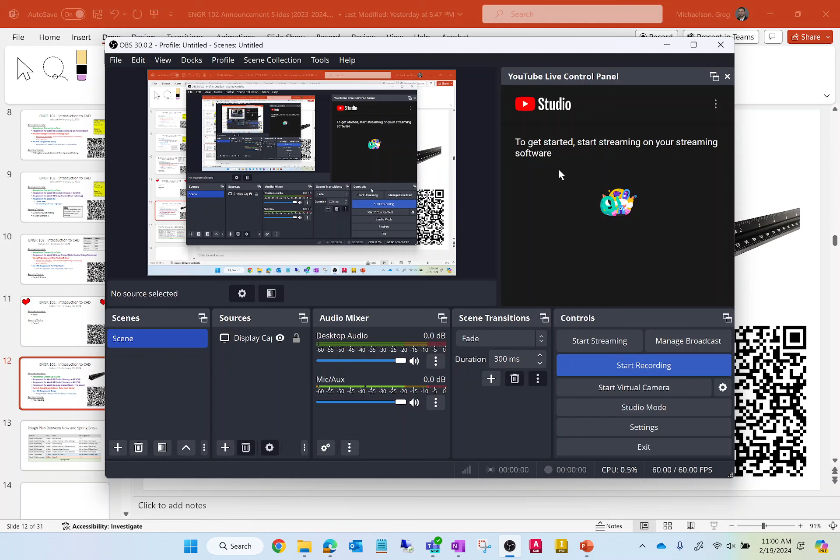One of the things I will tell you is that, independent of one topic left in AutoCAD, which is dimensioning, I've kind of taught you everything you need to know in terms of preparing drawings. And when I say everything you need to know, I mean technical-wise, in terms of what buttons to hit, what items to draw, and so on and so forth.

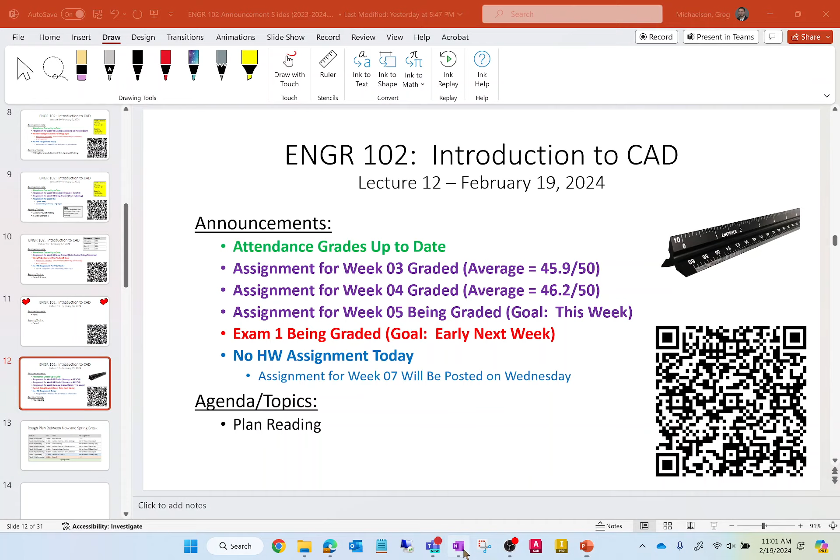To make the point, I want to bring something up real quick. I drew this on the board a long time ago, just a sketch of a plate with a hole in it. Now, my question to you all is, could you draw that today? Yeah, you could, right? There's nothing really to it. And so if I present you an engineering schematic, you can draw it, right? I think that's fair, okay?

What we're going to do for the next few weeks, yes? What do you mean by thickness? Like the line thickness? I'm talking about the thickness of the plate, like the part thickness. But what I'm saying is, from could you reproduce this, could you write that text in AutoCAD that says 0.25 inch thickness? And I think by now we all would say yes.

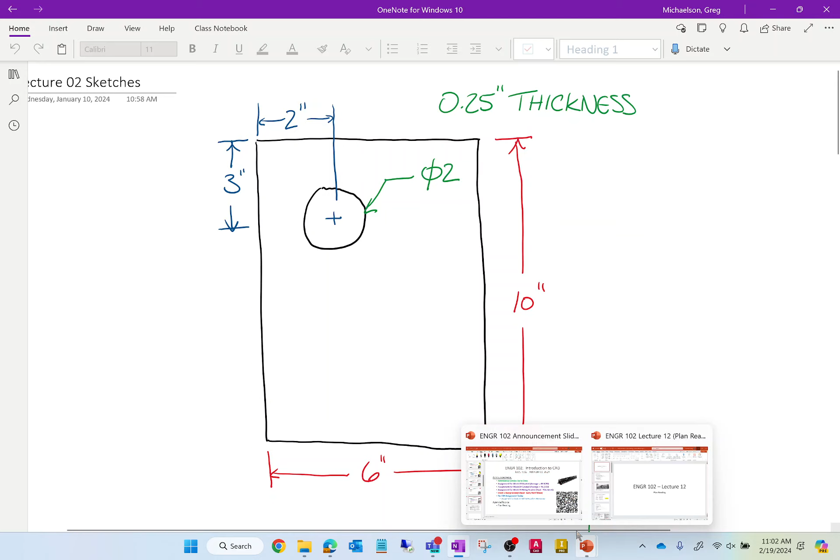What I want to do for the next few weeks is take the skills we've learned in AutoCAD and start applying them in more real world settings. So for the next few weeks, when it comes to specific AutoCAD skills and what's on the assignments, I'm probably going to be a bit less micromanagerial. In other words, the assignments are probably not going to be draw a line that is 1.5 units across at 60 degrees and so on. Instead, it's probably going to be, here's an object, reproduce it, or prepare drawings for this object and so on, because you all have the skills necessary to do it.

So I will probably be light in my specific instructions on AutoCAD and more heavy on actually applying those skills in some settings. Does that make sense? I just want to prepare you for what's coming.

Today and this week will be a little more loose in terms of work requirements, for a couple of reasons. One, it's my first time teaching the class, and the last thing I want to do is keep shoving material down your throats. I want it to be absorbed, and I want it to make sense.

So I started to prepare some lectures for this week, and I was going through the dimensioning lecture, which was going to be our topic this week, and I remember sitting there thinking, man, it'd be really nice if we could actually look at some engineering drawings. Then I looked at my outline, and we were going to look at engineering drawings, and I went, wait a minute, I'm the professor, I can rearrange this if I want. So I said, let's do that first, okay?

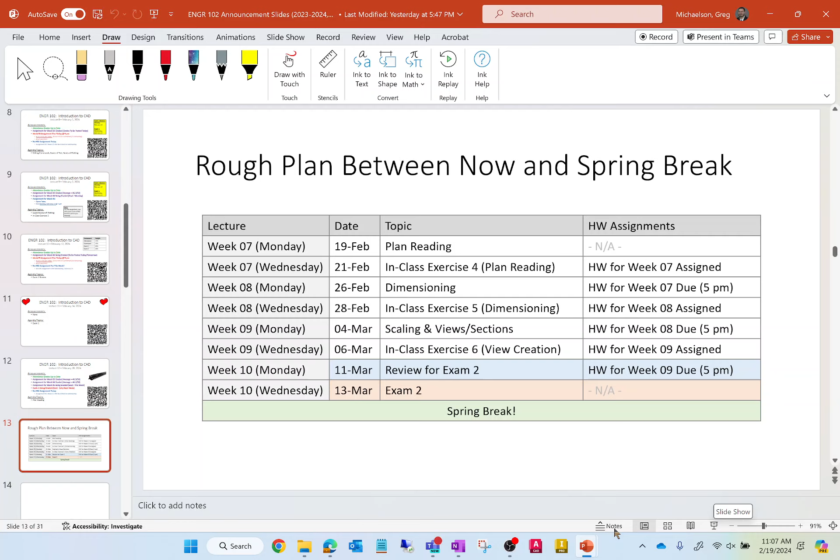So today, like I said, we're going to take a little break from AutoCAD. Today we're going to look at some real-world plans. We've talked about this a little bit at the beginning of the semester when we were first learning about this class. The very first lecture we had was, okay, let's look at some engineering drawings.

In fact, I might pull that lecture up just to refresh everybody, because I know it's been a while since we looked at that. Let me go up, let's actually take a look at that real quick, because I'll be brief. Oh, wrong week, that's the wrong one. It would help if I opened up the right one.

That's the one I wanted.

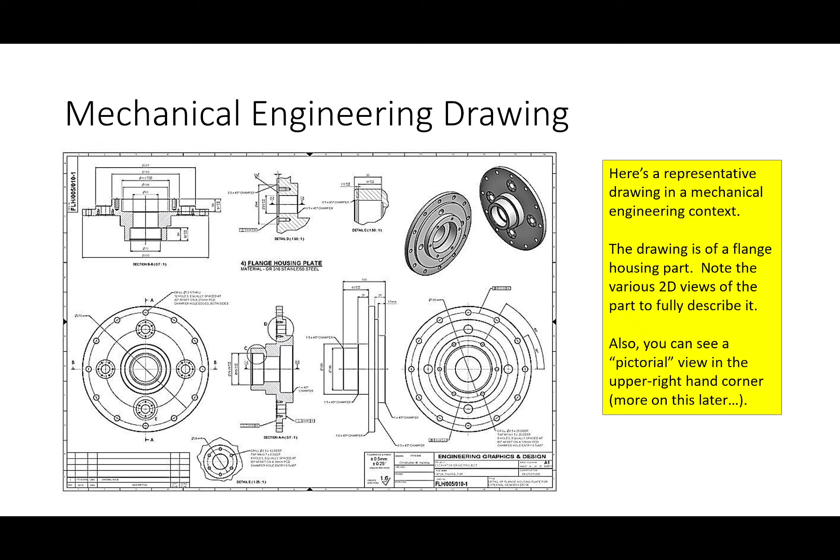So if you remember, we opened this lecture by looking at some engineering drawings. I showed a picture of a mechanical engineering drawing, a picture of a civil engineering drawing, and then the rest of that lecture focused on the AutoCAD objects of the drawing. Every drawing has lines, text, polygons, rectangles, and all of that stuff. And yes, that is true.

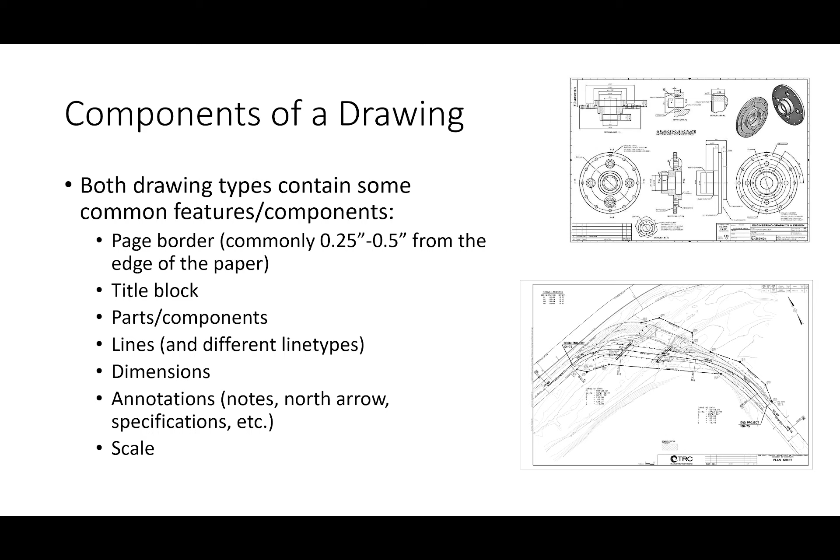That is important. You cannot construct engineering drawings without those objects. But a bunch of rectangles and offsets and trims and extends and ellipses doesn't make for engineering communication. Engineering communication has to communicate intent. So instead of talking about the components of the drawing, I think what I want to talk about today is what's actually in the drawings.

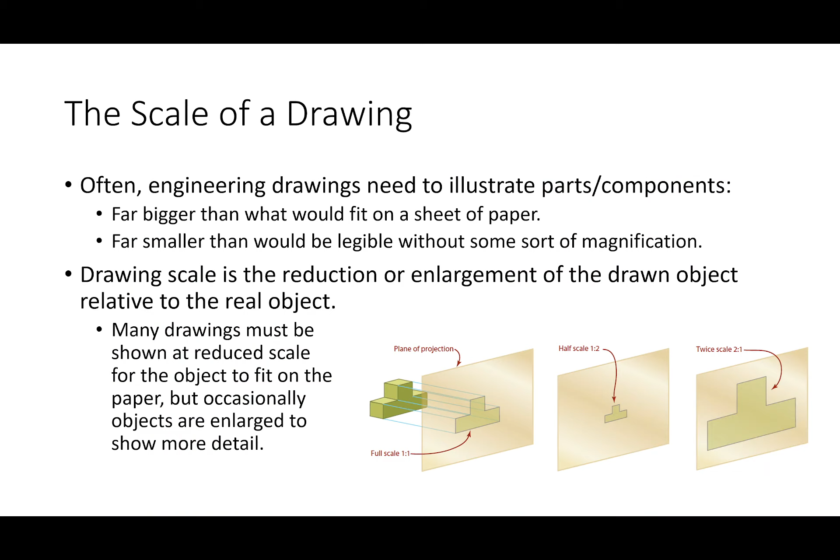A lot of last time's lecture was about the views, scale, dimensioning, and all this stuff. So now I actually want to look at some real drawings. That's what I want to focus on today.

Let's make sure we're clear about what engineering plans are used for. They're used for a great many purposes. I think taking a plan and a design and developing it into a coherent proposal is definitely one key use of a set of engineering plans.

I'd say the primary use, though, is probably to communicate the concepts, the dimensions, the ideas between the engineer who designs the component, the system, the assembly, and those who are going to construct it, fabricate it, or manufacture it. The engineering plan set is really the communication mechanism.

As engineering students, throughout your 4 years of education, AutoCAD and the skills we learn in this class can seem like a footnote in a grand 4-year degree program, because you'll go learn about thermo, fluids, strength of materials, manufacturing processes, hydraulics, and all this engineering stuff, and you might go back and think, man, it's been a long time since I opened CAD.

But really, at the end of the day, whether you're designing heat exchangers, pacemakers, retaining walls, or whatever, in order to construct those systems, manufacture them, or fabricate them, there have to be some sort of plan sets. That's really the goal at the end of the day.

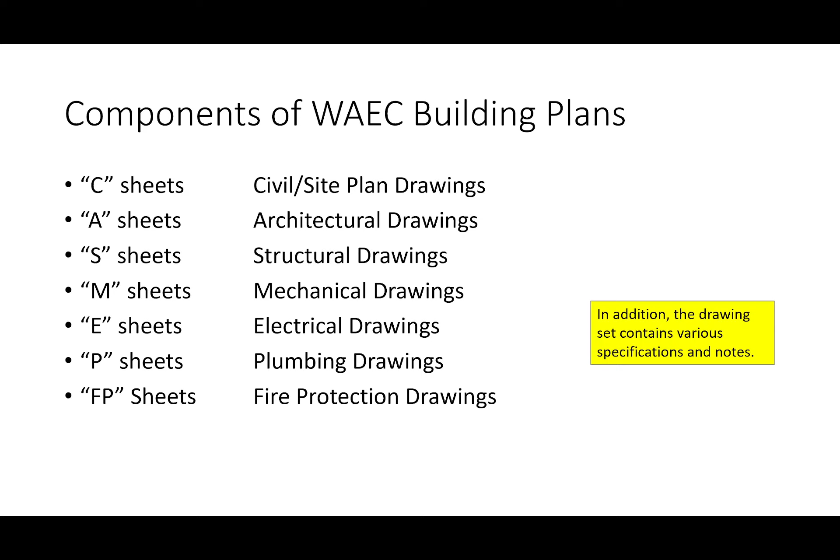Now I want to give you some understanding of the navigation of what's in these plans. I like this because there is content for pretty much every discipline in here. The biomedicals in the room, your drawing sets, would be very akin to mechanical. This drawing set contains both mechanical drawings and civil drawings, so it kind of works out for everybody. But I want you to get an idea of what the plans would entail.

The first thing you'll see in the plan set are the civil drawings, if you go through the volume, because the civil drawings contain what would happen first during construction of the building. So for example, we're talking about the existing site, demolishing the existing site, laying out the building. We're talking about grading the site. Does anybody know what I mean when I say grading?

But what does that mean? I'm curious. Making the land? Say it again? Prep the land? Prep the land, yeah, the slope and the grade of the land, yes.

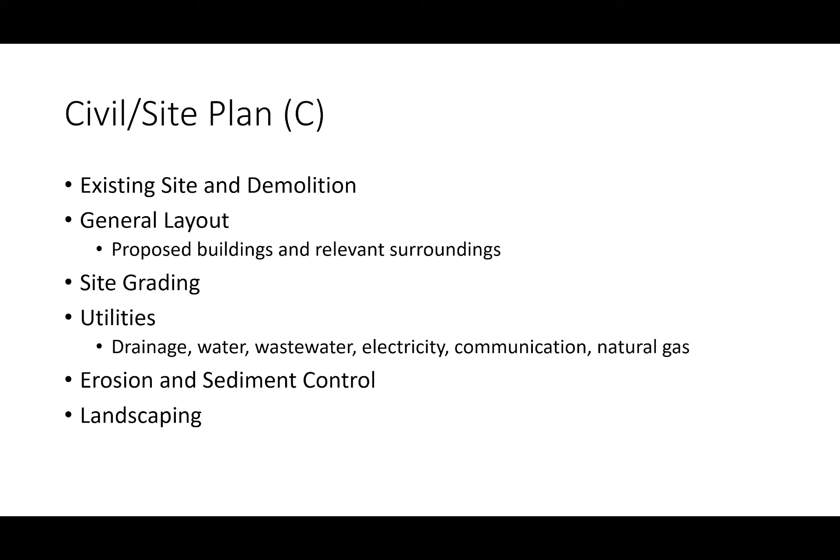There are drawings that define where the utilities are, so we're talking about electric, communication, natural gas, water, wastewater, all that. Erosion and sediment control — when it rains, you need to control the earth and the dirt so that it doesn't get into the water system. All the landscaping, the trees, the bushes, the shrubbery, all of that is going to be in there.

So here are some images of some plans, and we'll probably pull them up here in a little bit. A couple things worth mentioning — if you all want, go ahead and open them now. I've got one of these civil drawings up here. A couple things worth mentioning.

First off, you'll see that the title block is on the right. That's kind of common with building type drawings or architectural type drawings, that all the title blocks and stuff are on the right. You'll see that the title block is much more involved than our title blocks in this class, but the idea is kind of the same.

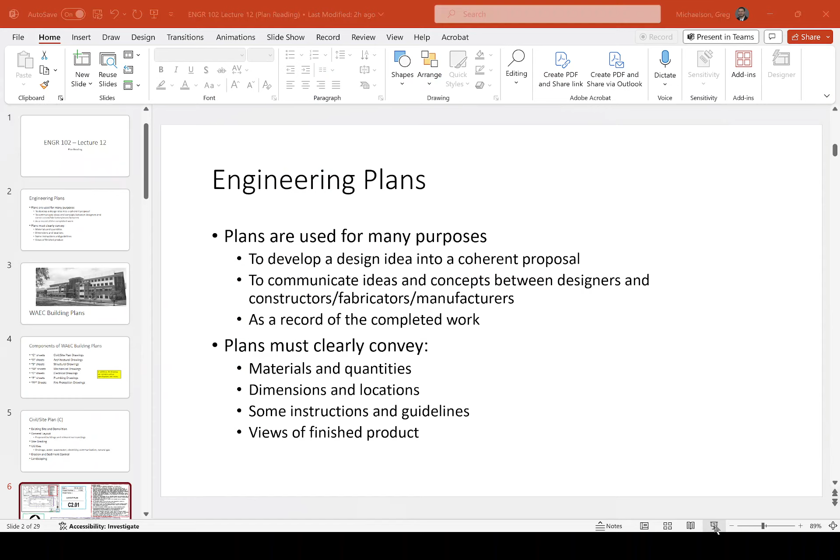Here, I'll pull up the civil drawings. I'll do the complete ones. Let's do civil. So for example, if you look here, you'll see all of the different contractors and engineers and whatnot.

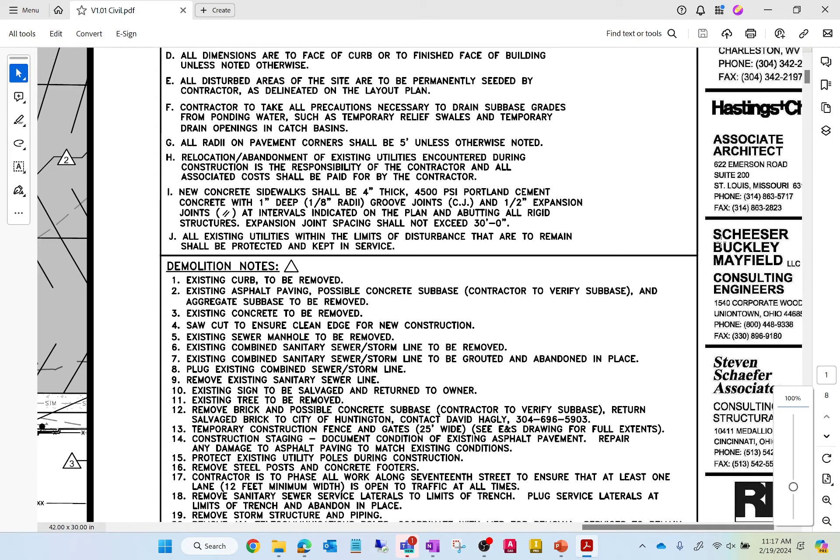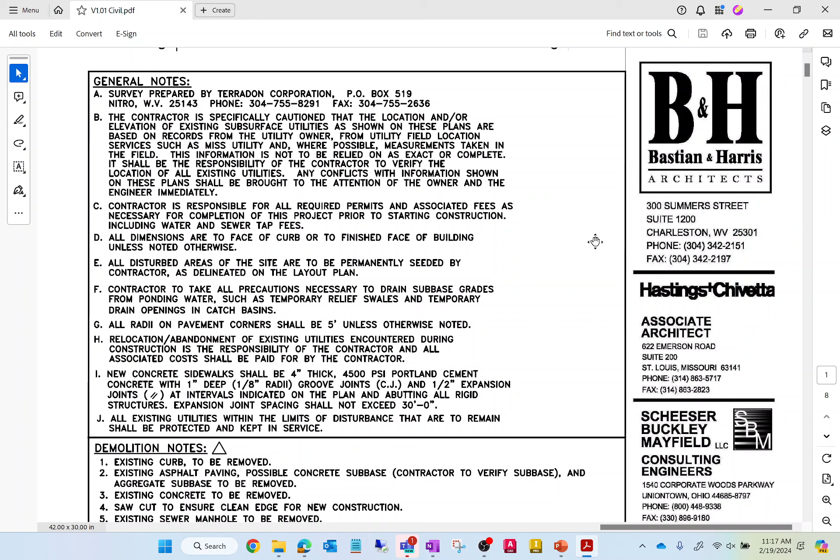So Bastian and Harris was the company that oversaw the entire project, and then we have a series of subcontractors. We have consulting engineers, consulting structural engineers, a lab consultant, consulting civil engineers, and a bunch of different subcontractors that would work on this.

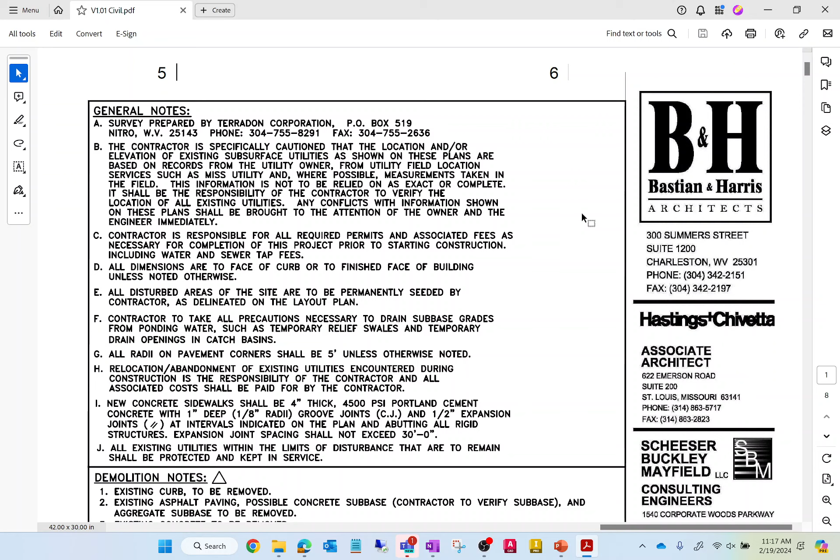It is very rare that a project of this magnitude would just be left to one company. It doesn't really work like that. The contractors are going to sub out various components of this project to other entities, and it might even be possible that those contractors sub out again, so you might have subcontractors of subcontractors. Very, very realistic. So you'll have some general notes about the project as a whole.

Let's go down here. We've got our sheet numbering and sheet name here. We've got various north arrow and so on and so forth.

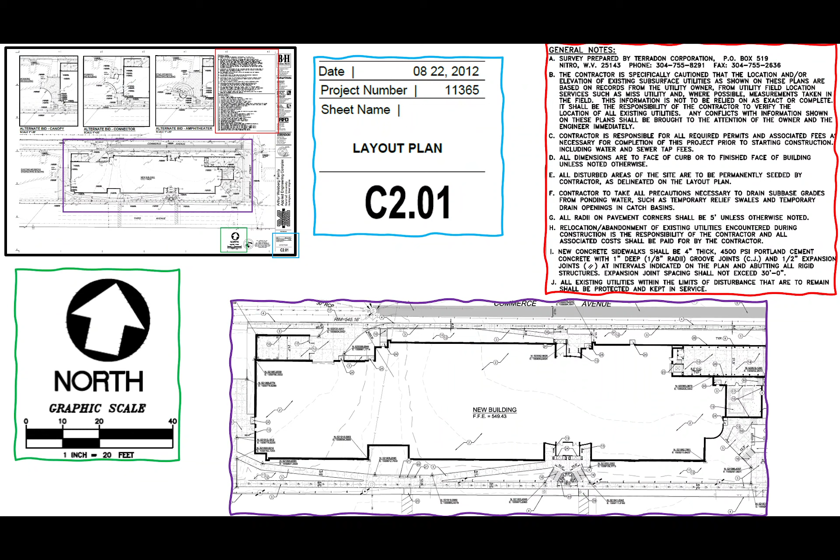I'm curious about a couple things. Let's see your predictions here. So this is the footprint for the new building. I am curious, does anybody know what the term FFE means? They have an idea what they think that means. So FFE equals 549.43. Anybody have a guess as to what FFE stands for? Curious. Anybody guess? Anybody have an idea?

How about the first floor elevation? So if you're grading the land and these are the civil drawings that are establishing the site layout, once it's all said and done, we would want to know what the elevation of this point is, right? So that's what FFE stands for, first floor elevation, okay?

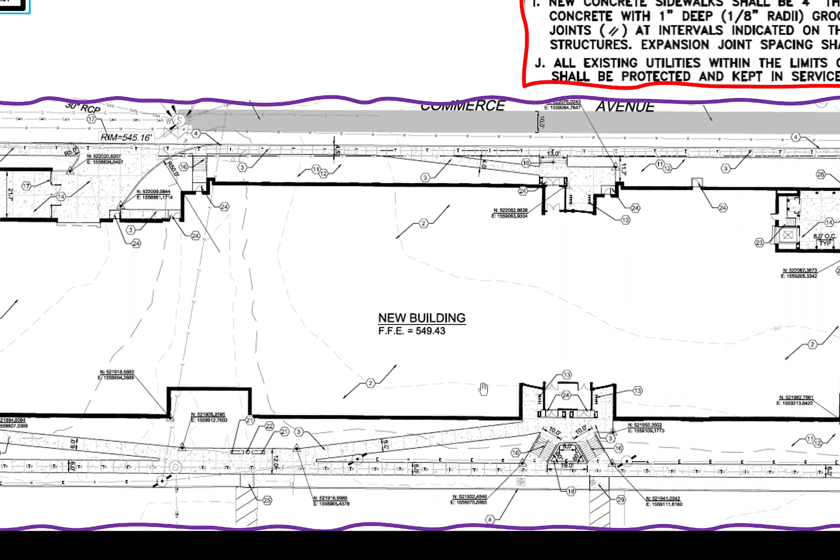There's going to be a couple other things we see throughout the drawings that sort of lead to that. Let's see what else is noteworthy here. Again, we're keeping it pretty loose today, I just want to go through some basics.

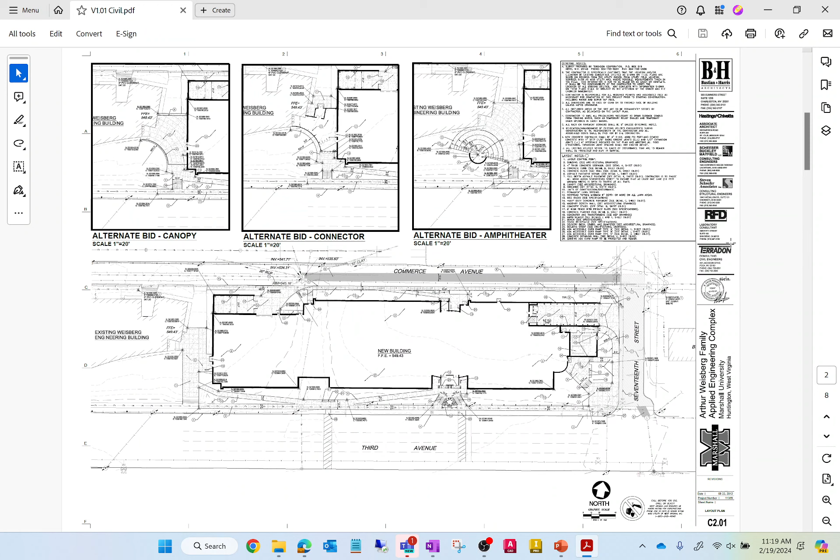Let's take a look at this very first page within the civil drawings. Does anybody have an idea what we're looking at here? What is this an image of? It's a parking lot, yes, but more specifically, why would we put this here? Because this is what was here before, right?

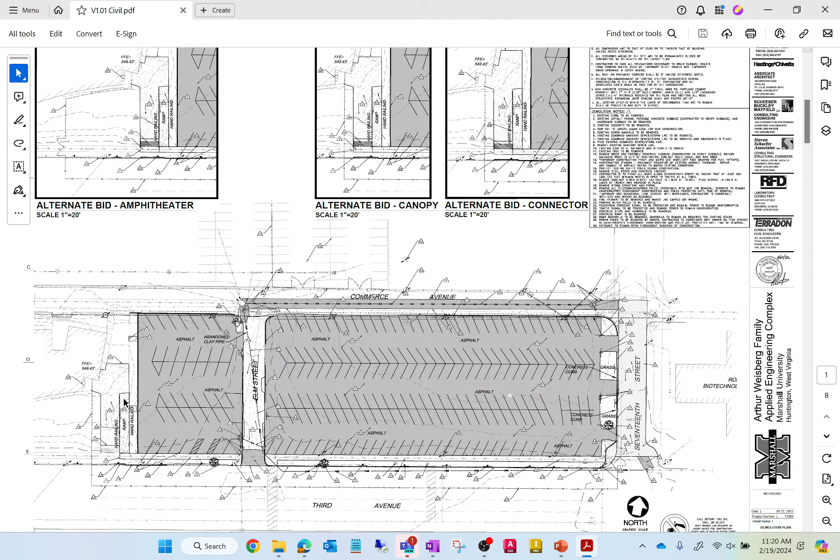This was a parking lot. How many of y'all knew that? This was all one big parking lot. Why do you think we built the parking garage on 6th Avenue? To make up for all the parking spaces that we stole when we built the building. Did y'all know that? No. Well, now you do. So we lost parking spaces at Marshall when we constructed the facility, so to offset the decrease in parking spaces, we put up a parking garage.

Let's see what else I think is worth noting on here. I'll tell you something that's worth noting. Let's take a look at these. So we have a lot of section views right here.

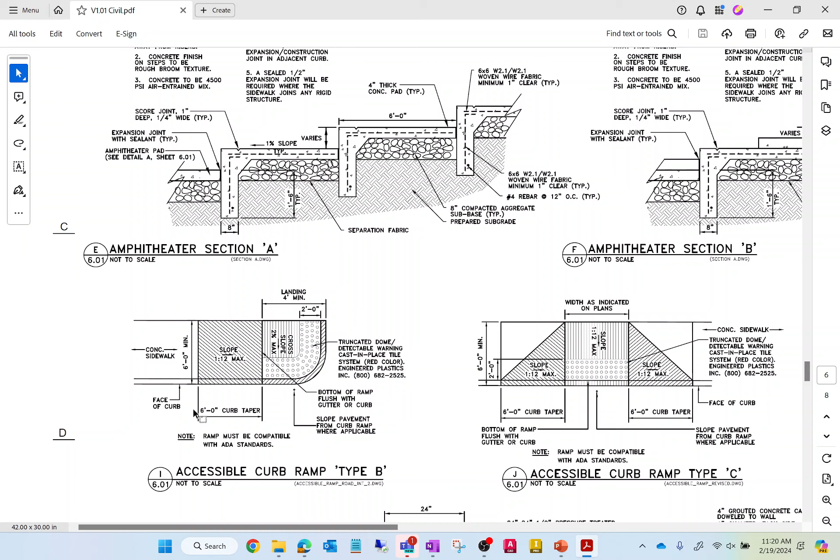What we're seeing here, to be clear, we'll be able to discern a lot of these a little more later as we start looking at specific sections in the building. But I'm just picking one right here, this section E601. So this is amphitheater section A.

To give you perspective, earlier in the drawings, and I'm being a little loose on this because I'm going to make you read the plans and answer some questions - I don't want to give you answers about the homework before I've assigned it - but in this drawing set there are a series of alternatives for various components on the site. So spoiler alert, one of them was an amphitheater, and it's not here because they chose a different alternative, right? You'll see what I mean when you start looking at the plans, and then you'll go, oh yeah, I guess they did choose that.

But what we have here is a section view that contains some specific details that, should they have chosen to construct this, is what it should look like. Okay, but let's just take a look at this image you see right here.

Tell me what about this image is something you can't produce with the skills you have right now. I don't know about you, but I see some lines, some hatches, some dash lines, some notes with text, some Romanesque text by the way - you know, it's like all that Romanesque text that looks like, oh we never use that in the real world, and there it is, right? But in all seriousness, I'm sure some of you are thinking it would take a long time to draw that, but do you have the skills necessary to draw it? Is there anything here you've never done before?

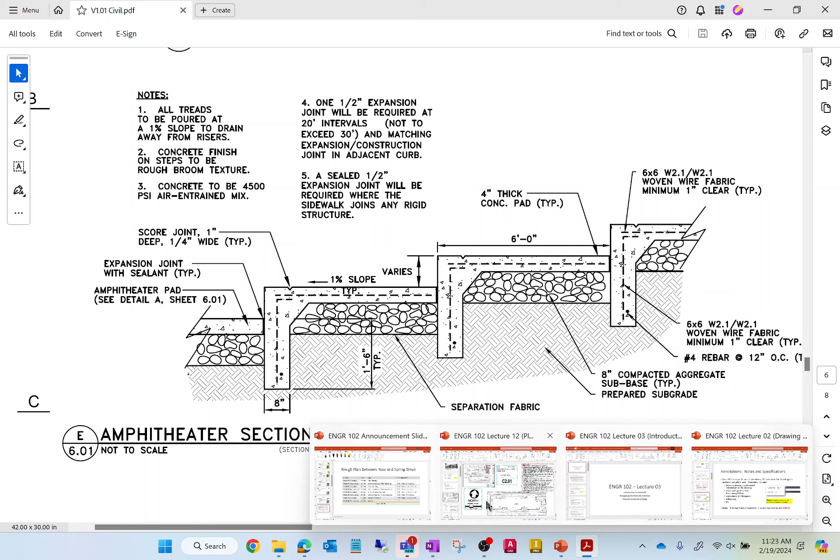All right, architectural drawings. This contains all of the information regarding the room layouts, and the specific information about how the building should be finished at the end of the day. So we're talking about things like where the wall partitions are, the floors, where the windows go, where the doors go, the general plan for the furniture, and exterior finishing. By exterior finishing, I mean brick facades, precast concrete panel facades, elevation views, and so on and so forth.

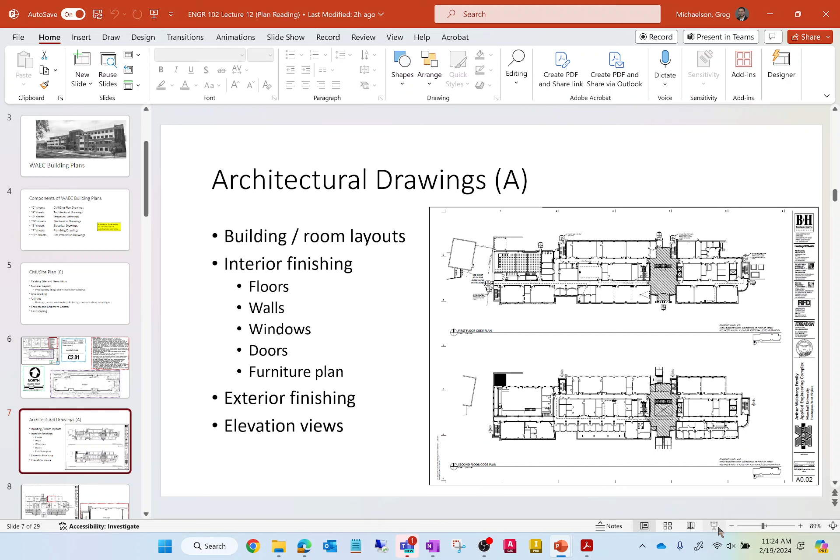Of all of the plan sets in the presentation, I think the architectural plan sets are the prettiest. They just are. They're the ones that really contain what the building's supposed to look like at the end of the day. Now I'll show you something in the architectural plan set that's kind of nice, which I thought was kind of neat.

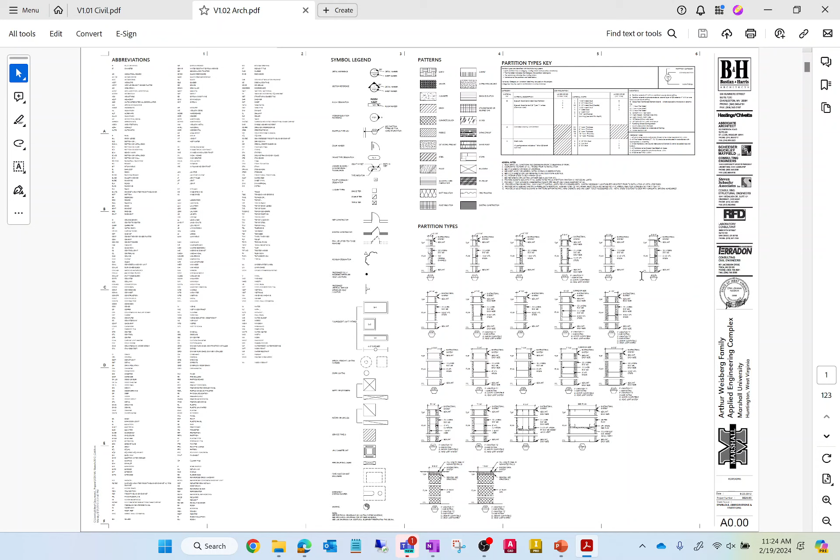Here's the architectural plan set. If you start scrolling down, see these icons here at the very bottom? See the one on the bottom right, it's this outline with like a gray square? Now if I scroll down to the next page, see how it's the other side of the square that's highlighted? Does everybody see that? What do you think that represents? It's what side of the building we're looking at, right? That's the side of the building we're looking at.

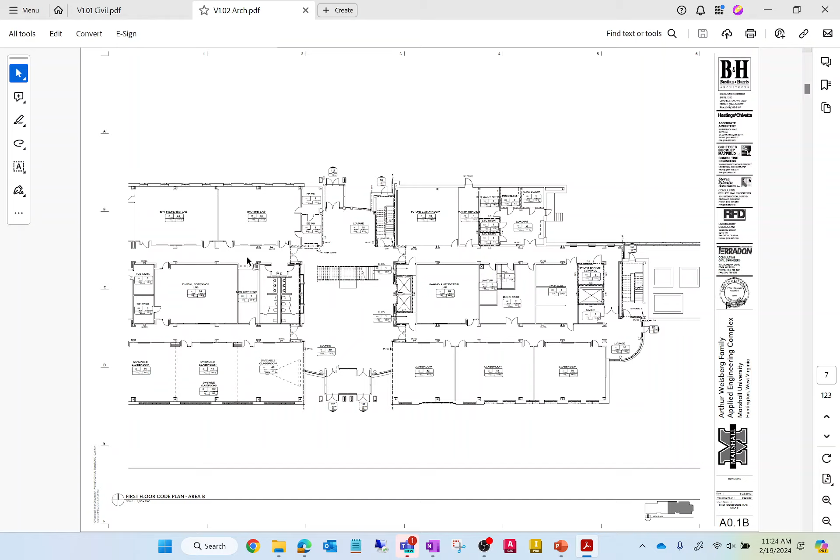Okay, so for example, let's scroll down here. So what do we got? We've got this side of the building. What are we looking at here? Us. That's us. That's the classroom we're in, right? So this is the dividable classroom.

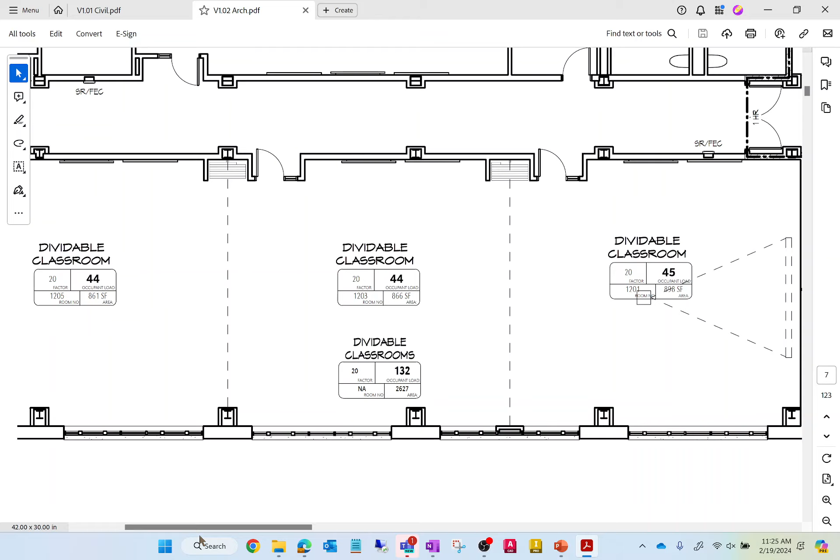So if we scroll over here, what do we see? Here's the main entrance to the lobby, right? We scroll over, and what do we see? We see 1201, 1203. Sorry, I scrolled over too far. We see 1201, 1203. I'm curious, does anybody know?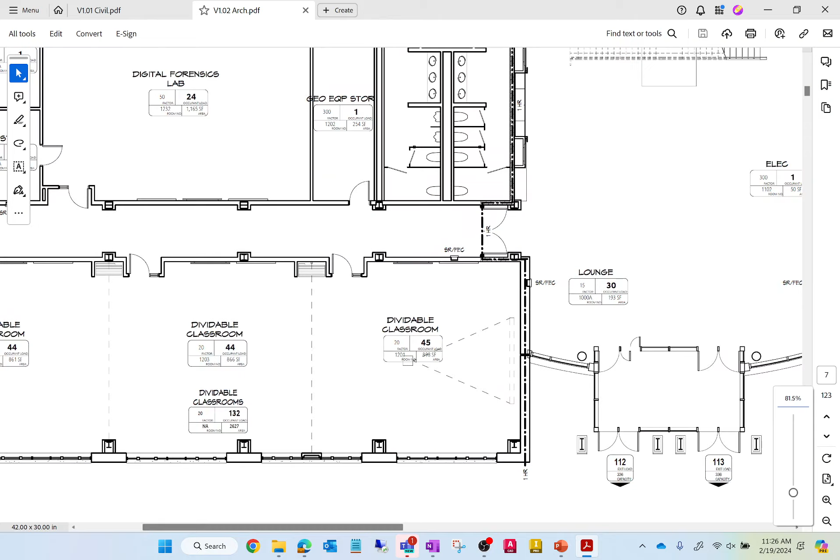There's a screen right there. Oh, projector. Where's the... that isn't turning on. Of course it's not. Dang it, that would have been really cool if it just turned on. Just the projector. I don't know, maybe I'm supposed to turn it on here or something. Where's the projector? No mic drop today. No, but yeah, we haven't installed the projector yet. We were actually going to try and install it right before the semester started, but we weren't able to get it done from an IT standpoint. IT was all hands on deck for a new building on 4th Avenue. So we'll probably try and do that next year. We're actually going to mount it like right there, you know, but alas.

But okay, a couple things worth mentioning. If you look here at the dividable classroom, let's see if we can understand what's going on. This is where we're at right now. What's going on inside this little square right here, and why is there the letter I inside that square? I'm talking about at the bottom right there. There's a beam or a column, that's these right here, and behind this there's a steel column directed upwards. So if you wanted to know what that steel column was, go to the structural drawings. They'll tell you whether it's a W10 by 49 or a W12 by whatever. That's what's going to be listed there.

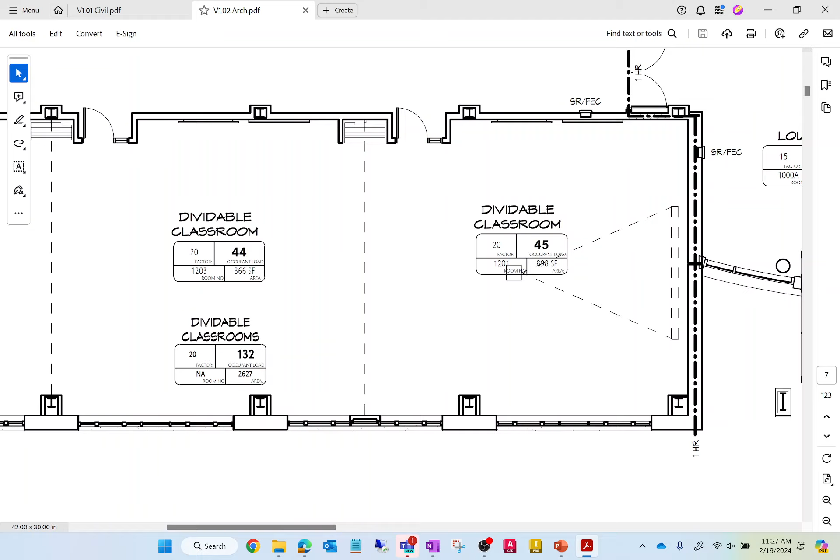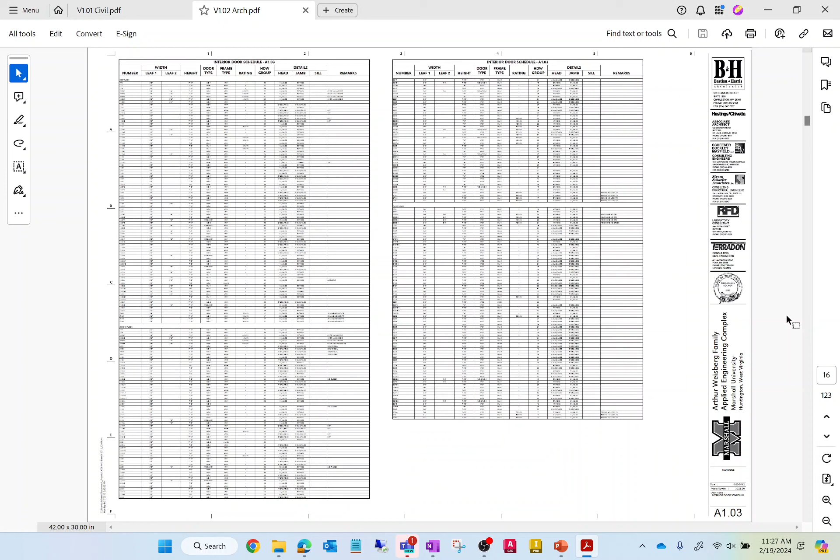Let's keep on going through these because there's a lot of really cool stuff in these drawings here. Fit height. Okay, because I got some really cool stuff I want to show you here. All right, so let's see.

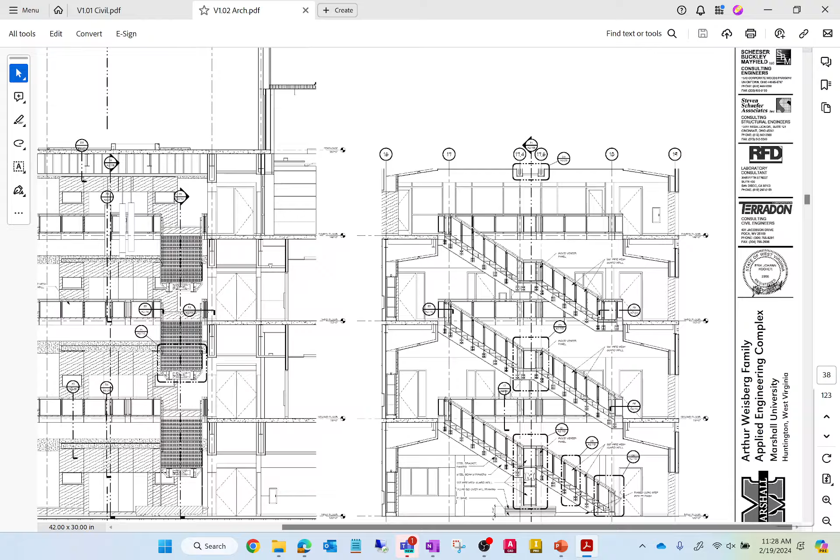Let me see. First floor plan, second floor plan, canopy alternative, stair. First off, I just think these images are really, really pretty because you can see cross sections of the stairs and whatnot, or what have you.

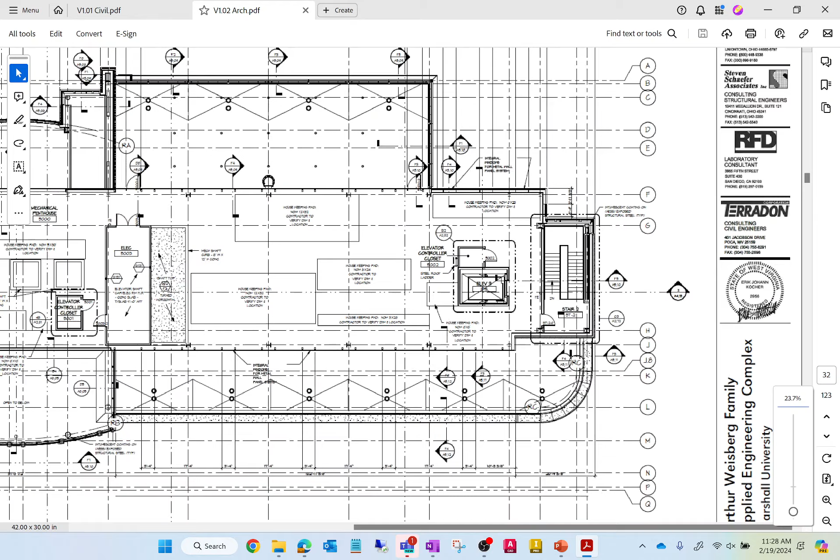One of the things worth mentioning as you go through these drawings is we usually try to make them as navigable as possible. So if you look right here, this is the 5th floor. Yes, there is a 5th floor of the building, and it contains all of the MEP - mechanical, electrical, plumbing, the HVAC, the air exchange, heat exchangers, all that stuff.

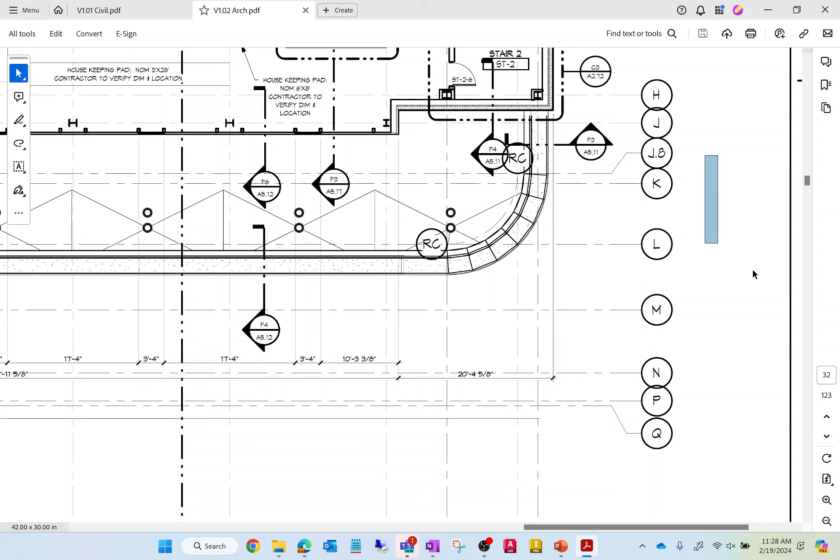One of the things you'll notice is this sort of legend right here. On the left and right side of the building, you'll see K, L, M, N, P, Q, and so on, and on the bottom you'll see column 22, 23, 24. So there's a common grid reference for referencing the building. As they construct it, when you're on site, you might think, okay, this column right here is column H26 or what have you. So while constructing, you'll have a common frame of reference.

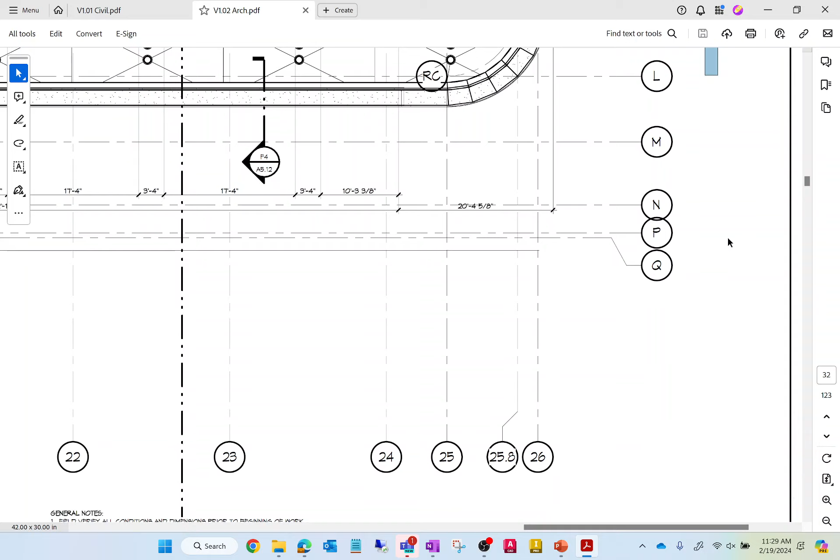Let me see if I can find the furniture plan, because again, engineering or architectural drawings get that detailed. So let's see, that's the... what's that?

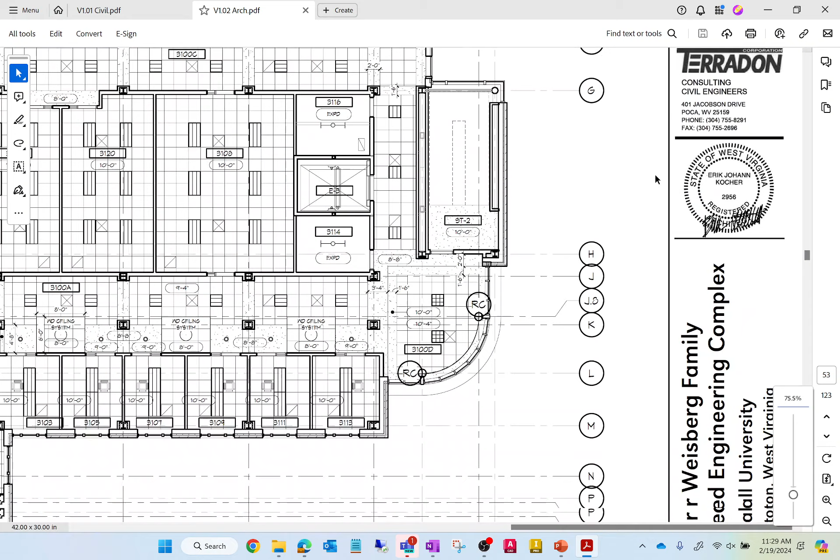No, these are the ceiling tiles - that's a good question. This right here is the 3rd floor ceiling plan. You can see, I mean it might sound silly, but somebody had to estimate how many different ceiling tiles they had to order for this project. Where are the ceiling tiles? Where are the lights? So for example, if we go over here, we have the ceiling tiles, we have the vents, we have the lights. All that stuff has to be estimated.

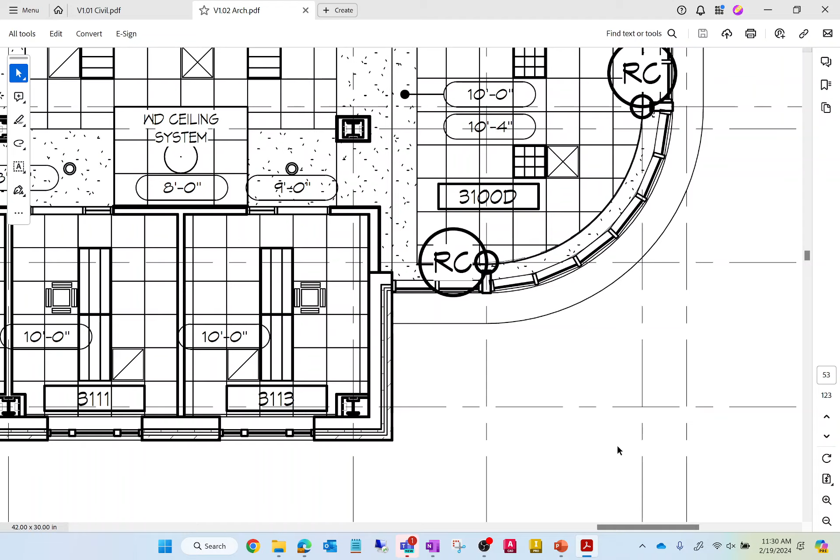Let's see, let's go a little further. One of the reasons we had an abridged assignment is just that - we didn't want you to have to navigate through all of them, so just a few of them.

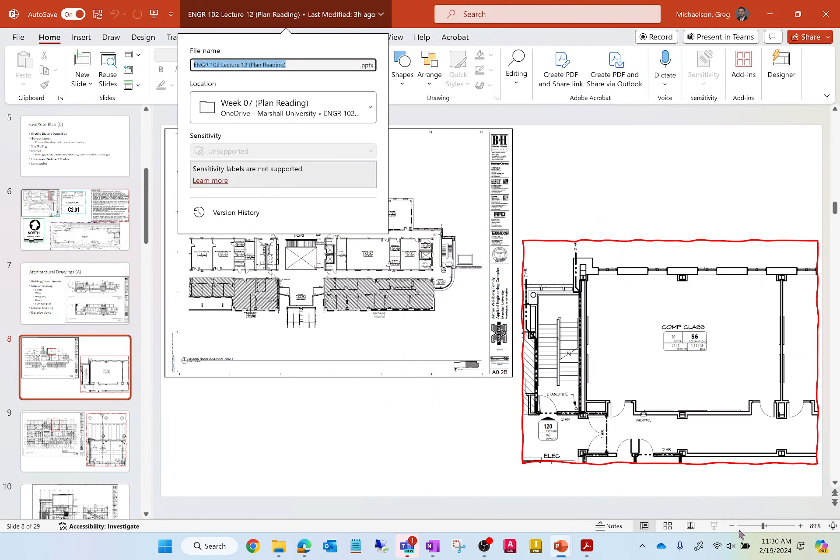I'll tell you what, I've got something I want to show you. A couple things. So if you look at the individual classrooms, for example, this is room 2121, you can see the square footage of the classroom and the occupant load, the safe number of people inside the facility.

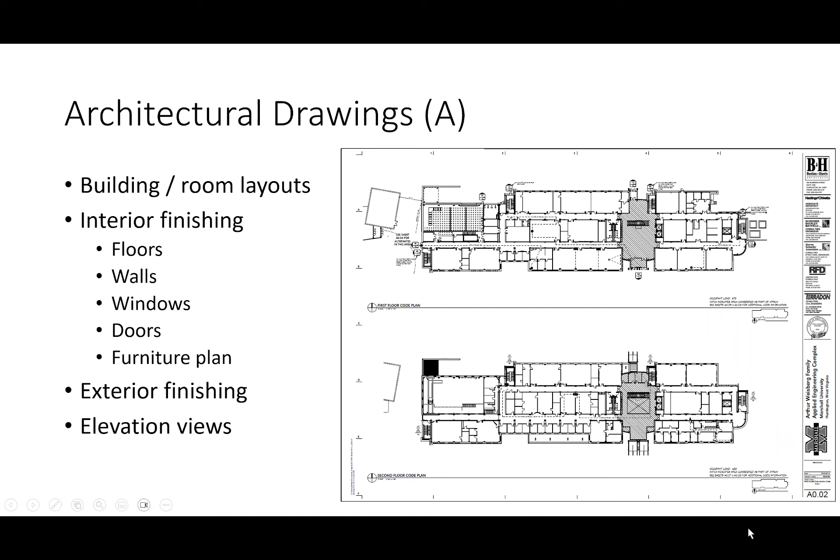But one of the things I actually want to show you is this drawing right here. This is a second floor plan, and we're looking at room 2121, the computer lab here on the second floor. What I've done is zoomed in to this room 2121, and I want to ask you a specific question about this right here. So this little icon right here, it says F3 A5.09, there's another one right here, F3, so I'll highlight it for you all over here. We're looking at this icon right here.

Does anybody know what that is? What do you think that's representing? Why is there an icon there, and why does it look like a big old arrow pointing to the right? For example, if you look at the very top, there's another one with an icon pointing to the left. Does anybody have an idea what they think that represents? Anybody have an idea?

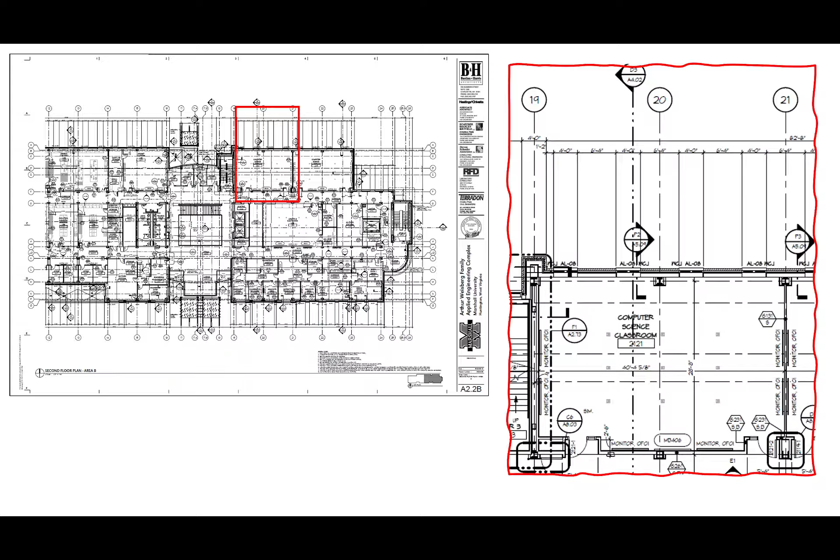Well, let me give you a simpler question. Where it says A5.04, what does that represent, you think? Maybe A5.04 is the page number? Look at the very bottom of the pages - if you go to any one of these pages right here, look right here, here are the page numbers, right? A5.09, A5.04. Let me show you what these are, and I'm going to take you on a trip down memory lane.

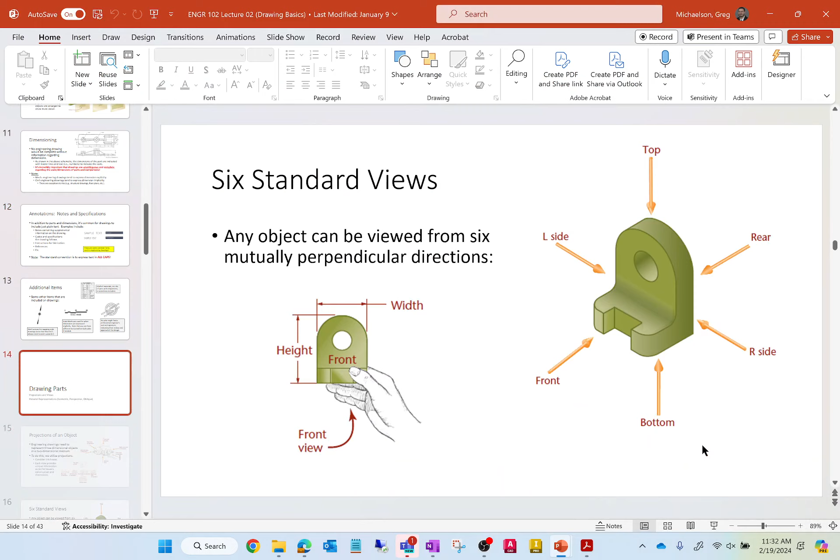Is it where you can see closer up, more detailed stuff in that area? Sort of - like what page it's on? Okay, so you're half right. The answer is yes - the A5.09, the F3, is a callout to what page that is.

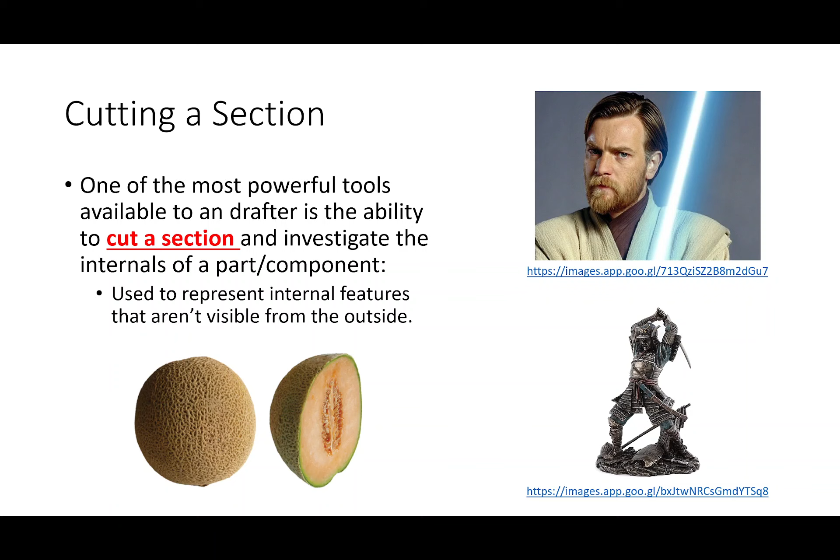But what we're looking at is a section view. We talked about this before - the idea that sometimes we want to see what's going on inside a part. So one of the most powerful tools is to cut a section. We break out the samurai sword or lightsaber if we're a sci-fi fan, and we cut a section inside. We showed an example where if we had some crazy machine part and wanted to see inside it, we'd cut a section and investigate what it looks like inside.

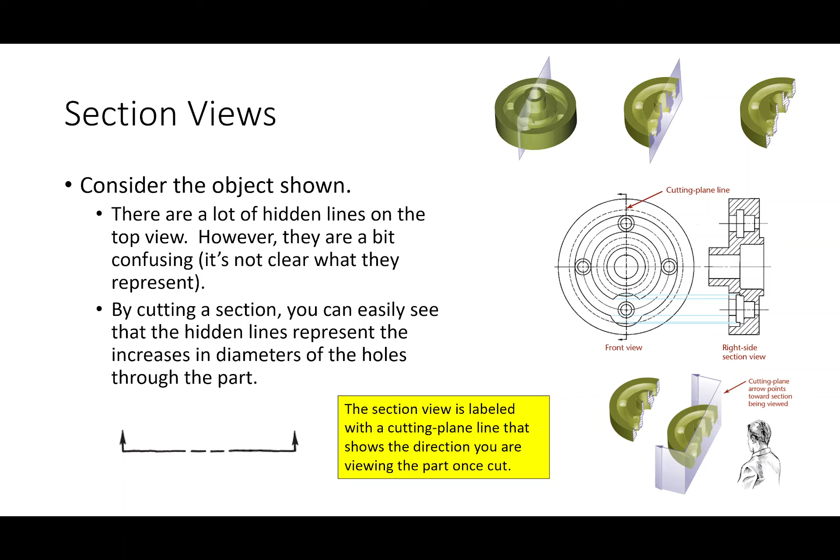And remember, the symbol was we would have these arrows that pointed in the direction we're looking. So I propose, if we go back to these drawings of the building...

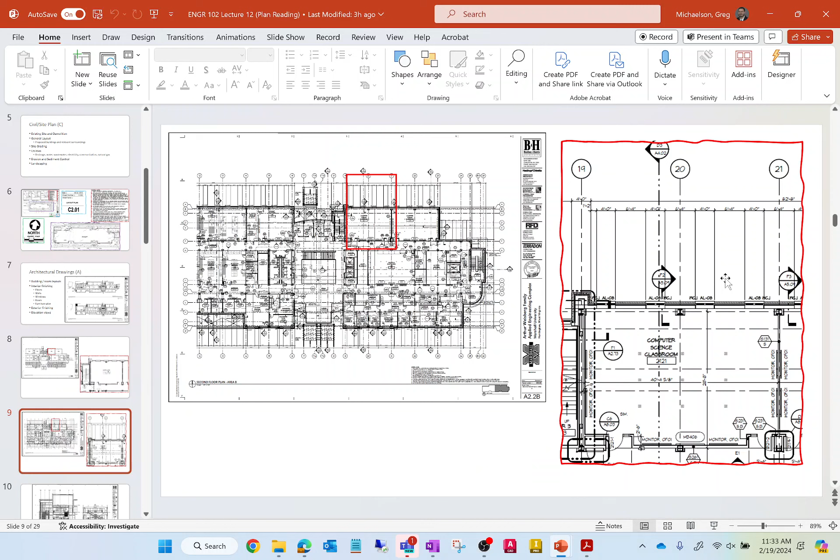I ask you, what are these section views right here? They're sections of the wall. If you cut through the wall and look at it, what would it look like? Let's go to that page, A5.09. Let's go to view F2. What are we seeing? We're seeing a wall section. So this is what the wall actually looks like in the building.

So what do we see? We see these targets off to the side that say first floor, second floor, and under the targets there's a number. Under the first floor target it says 100 feet, and under second floor it says 116. Those are elevation differences between the first and second floor. For the architect, all that matters is how tall it is from floor to floor, so they just set the first floor for the architecture drawings at 100 feet and go from there.

So what are we seeing here when we look at this? We see the brick, the insulation, the wall studs, the beams, the slab. This is what we're looking at inside the building. So not only are we seeing the plan view of the building, but we're seeing various section views necessary to fully construct the building. Does that make sense?

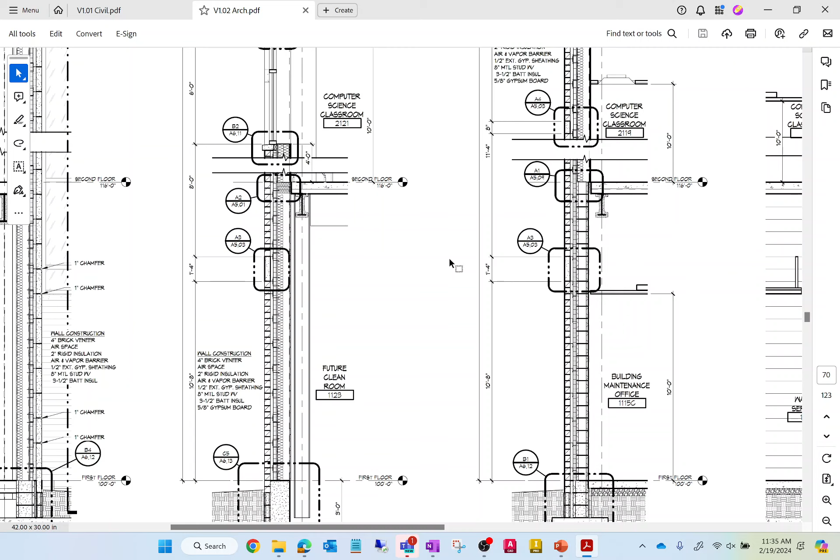So that's what those are representing. Let me pull this back up.

So again, we've got a lot of other really cool detail views. I just find this stuff really pretty. We've got section views of the building, views of the stairs. These are the stairs inside the lobby.

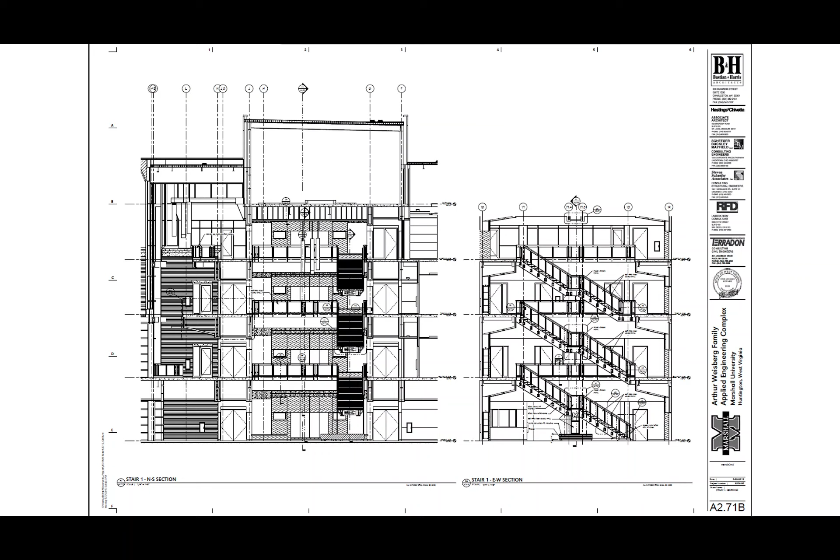Random factoid for you: one of the reasons those stairs are so massive is because if they deflect too much, you'll crack the tile. So, random factoid for you, that's why they're so big.

We see elevation views of the outside of the building. And again, as before, if you look on the side, see those little black and white targets on either side of the elevation view? Those are the elevations of the building. So maybe you didn't know, but it's 16 feet from this floor to the elevation of the next floor. How do I know that? Look at the plan—that was the design.

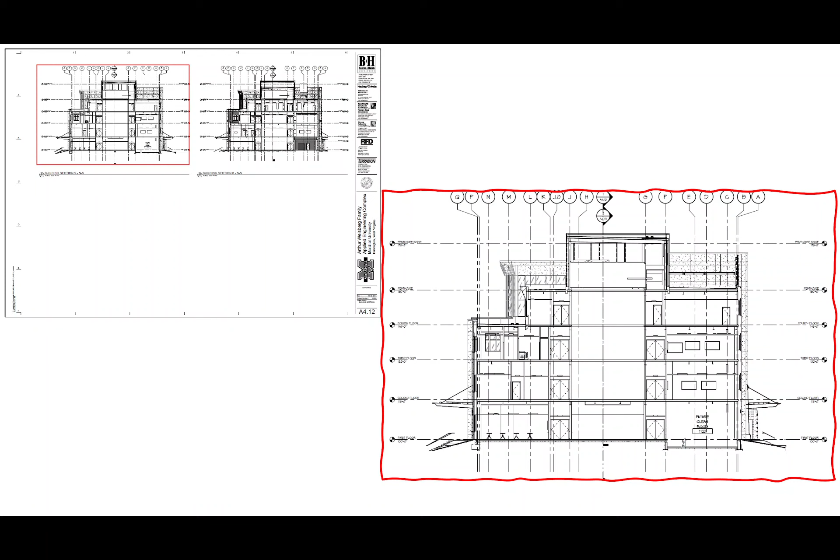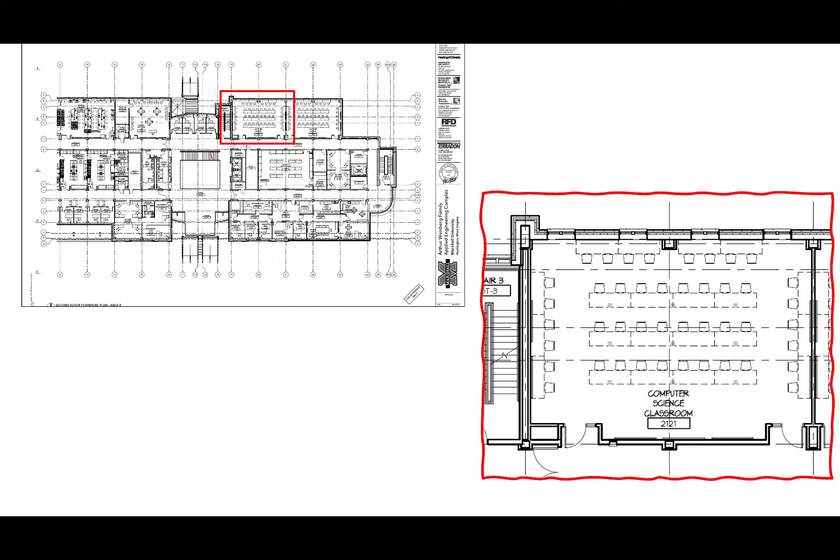And here are the furniture layouts. This is room 2121, and we can see that's actually kind of what it looks like—there's desks around the perimeter and in the center of the room. I'm not actually sure if the floor plans include furniture layouts for this room, because during the conceptual stage it was meant to be moved around, so I'm not sure what it says there.

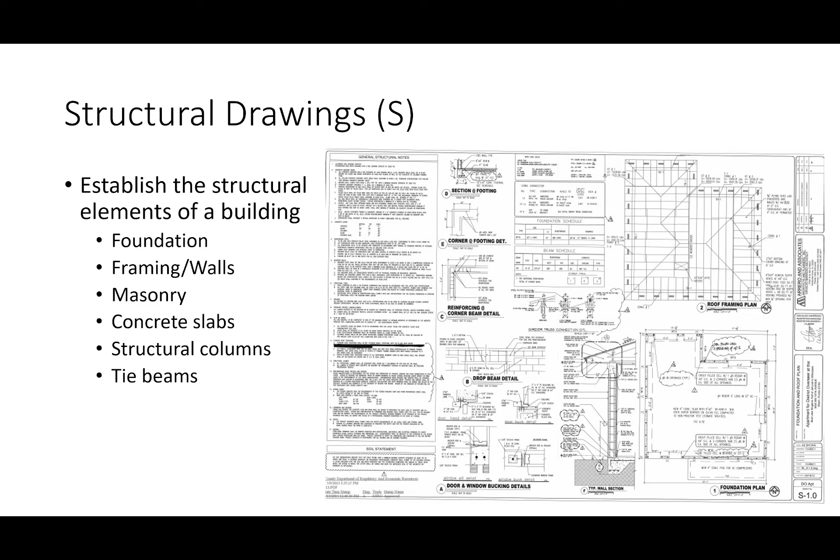Okay, so far so good? All right, so the structural drawings—the structure of the building is the component that actually keeps the building from falling down in short order. So we're talking about the foundation, the framing and walls, the concrete slabs, the structural columns, the beams inside the building—the stuff that keeps the building from falling down. That's what's inside the structural drawings.

And just so you're aware, the structural drawings can get pretty voluminous. I only gave you a couple of pages on the structural drawings for your abridged homework assignment, because I'm really only going to ask you some questions about the foundation. There are going to be a series of drawings, which I don't think we're referencing on the homework, but...

I did want to mention what's called fire protection drawings. So this is essentially the sprinkler system, but it can be beyond just the sprinkler system. I've got an example worth mentioning.

How many of you have parked your car in the Pullman parking garage? Have you seen that stuff on the steel beams? Kind of looks like oatmeal—they spray it all over the steel beams. Y'all know what that is? That's fire protection. It's there as insulation to prevent the steel from suffering too much adverse section property loss due to thermal loads from fire. So it's there as insulation—random factoid for you, that's what that is.

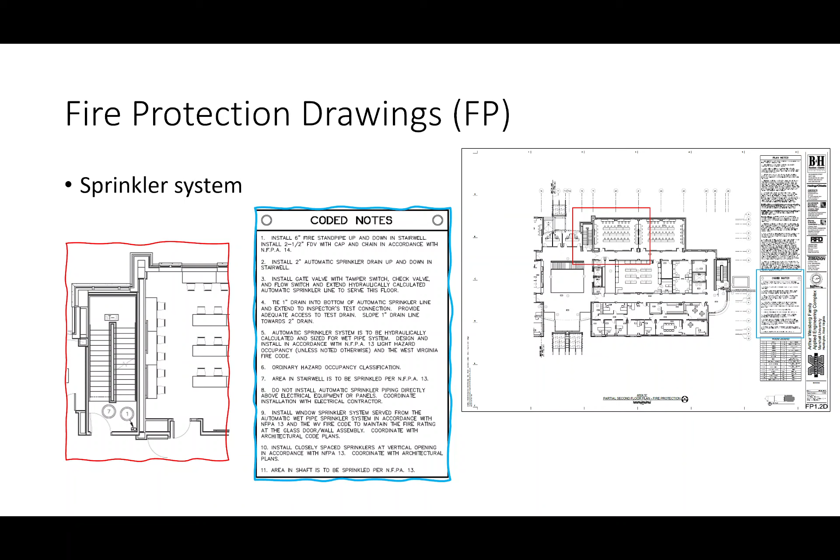So if you actually look in the guts of this building, you'll see that oatmeal-looking stuff sprayed around the beams and columns. If you've ever looked at steel beams and columns and wondered what that is, that's it. Random factoid for you.

Okay, the plumbing - water, wastewater, ventilation. The biggest plumbing needs for the building center around the restrooms, but it's not just the restrooms. So if the restrooms are one of the biggest plumbing needs, what's the other biggest plumbing need for the building, beyond fire protection?

There's another big aspect of this building that needs adequate plumbing. Well, the roof wouldn't really involve water lines, but it would have things like drainage, not pressurized water lines. There's another entity in this building that needs water - labs? The labs, exactly right. All the biology labs, the chemistry labs, all that stuff needs water as well.

There's all sorts of other aspects these plans can help us navigate. A common thing during plan review is, are we going to be erecting a building that is ADA compliant? Y'all know what I mean by ADA? What does ADA stand for? The Americans with Disabilities Act.

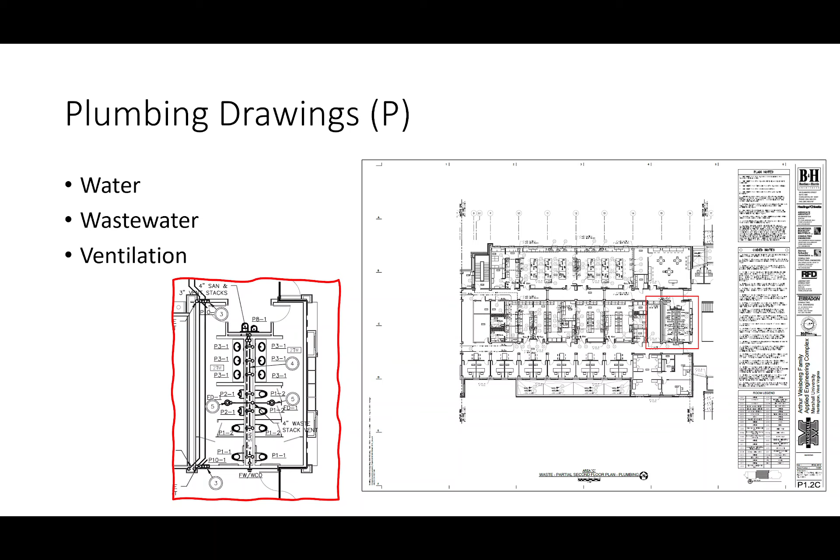So things like, do all the doors have door openers? Is there ingress and egress out of the building that meets ADA requirements? Why is that ramp from that door all the way down here so long? Because it has to be at a certain slope for wheelchairs, right? All that stuff has to be vetted before the building gets erected, and that's what plans can help us do. Here we can see some close-up views of the bathrooms and whatnot. It's got to be worked out.

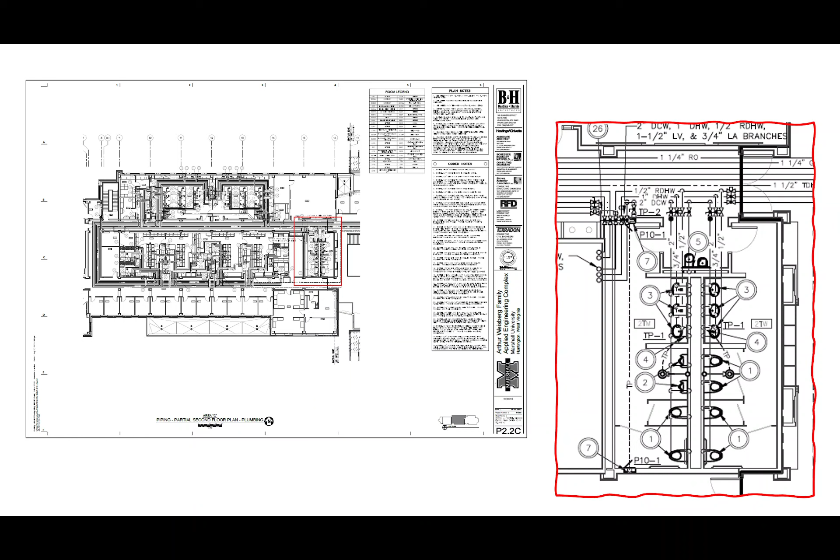One thing worth mentioning - there is a reason why the men's restrooms and women's restrooms are next to one another. It's because we can contain all of our plumbing needs in one location, reducing the linear feet of pressurized water line in the building. So not only does it make sense from a building layout perspective, it also saves money on plumbing. It's just the truth.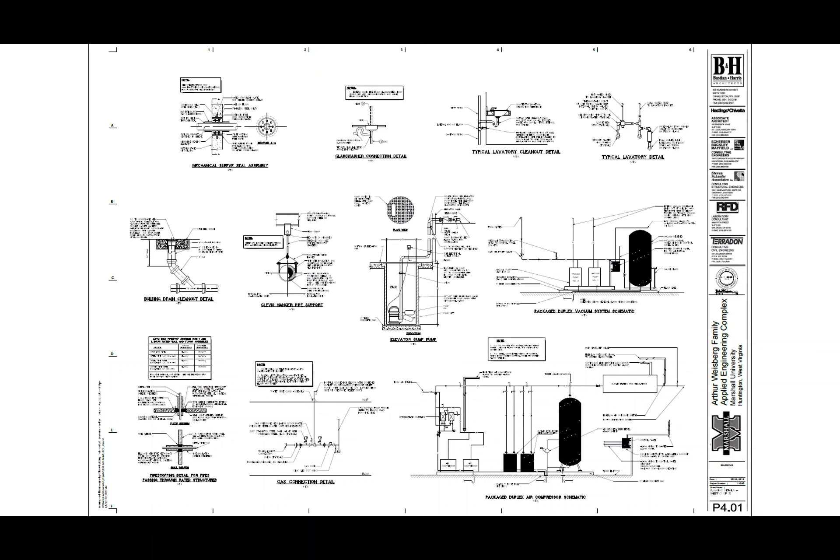For you mechanical folks, I don't know if you knew this, but I'm a licensed professional engineer, and there are avenues to get licensed as both a civil engineer and a mechanical engineer. Have y'all heard of the PE exam and FE exam? Okay, so the way the PE exam works, you pick your discipline and then your specialty. For me, I picked the civil engineering exam, and my specialty is structural engineer - I design bridges, that's what I do.

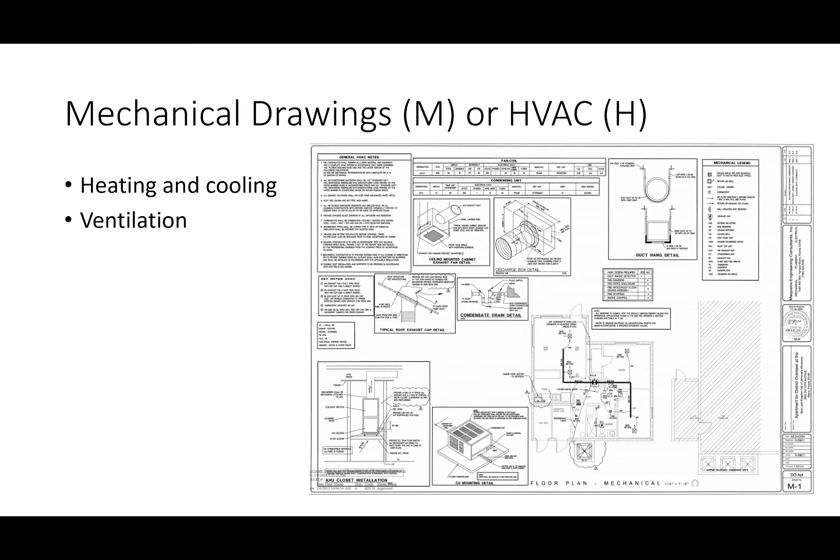For mechanicals, there are three specialties. The first is machine design, the second is thermofluids, and the third is HVAC - HVAC and refrigeration is one of the most common licensed specialties for mechanical engineers. A licensed mechanical engineer was the one who designed all the heating, ventilation, and air conditioning for this building. That's a common job prospect, a common avenue for mechanical engineers. So you will see that the plans contain all the necessary vent sizes, pump loads, and so on for the heating and cooling system.

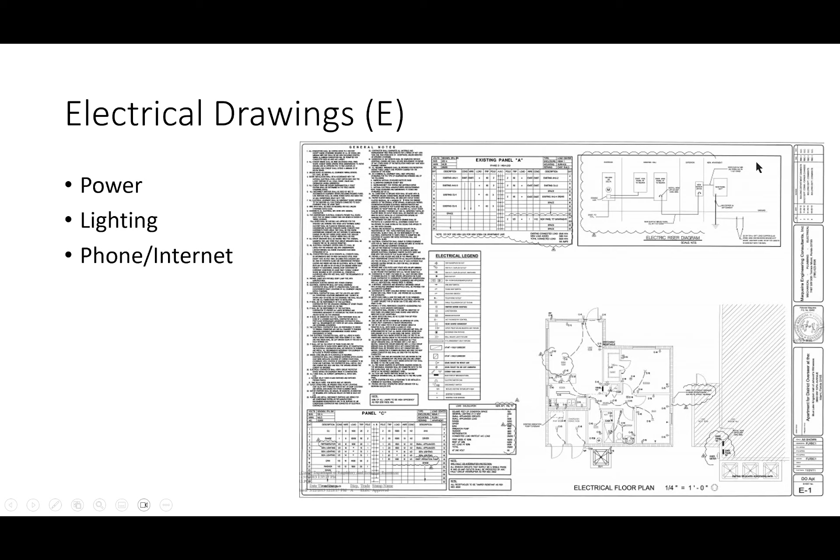Obviously this building has miles and miles of wire and cabling. I see these electrical plans and they just sort of scare me. I know that when you hit the button on the wall, the lights come on - that's about all I know about electrical engineering. Okay, that's a joke, not very funny. Okay, I just want to highlight a couple of the details you'll see in the plan.

So here we see an example of a footing detail. What is a footing? First off, it's footing, not footer. It's like the concrete thing that goes around where the walls are going to be, the connection between the building and the ground. It's the mechanism that transfers the load to the ground, and it is part of what we would call the foundation.

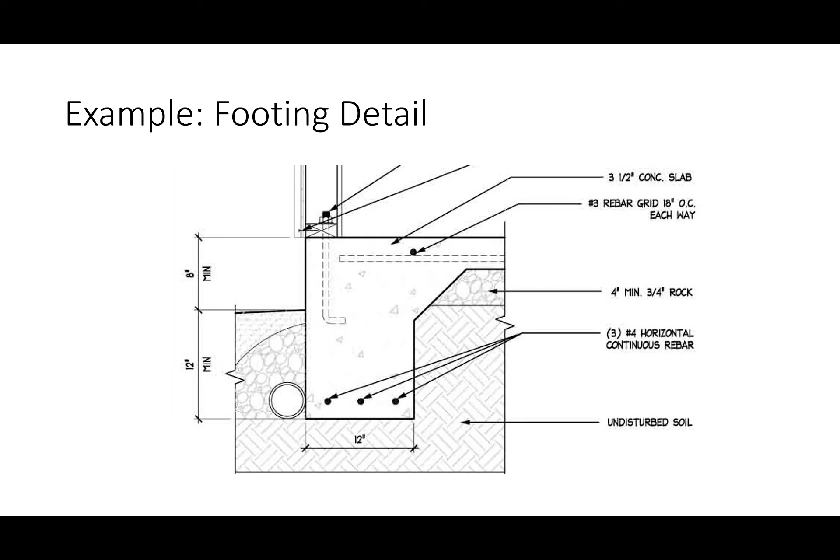I know that they are referred to as footers, but the technical term is footing. I might use the term footer though every now and then, so I can't hold too much against you on that. You might also see this.

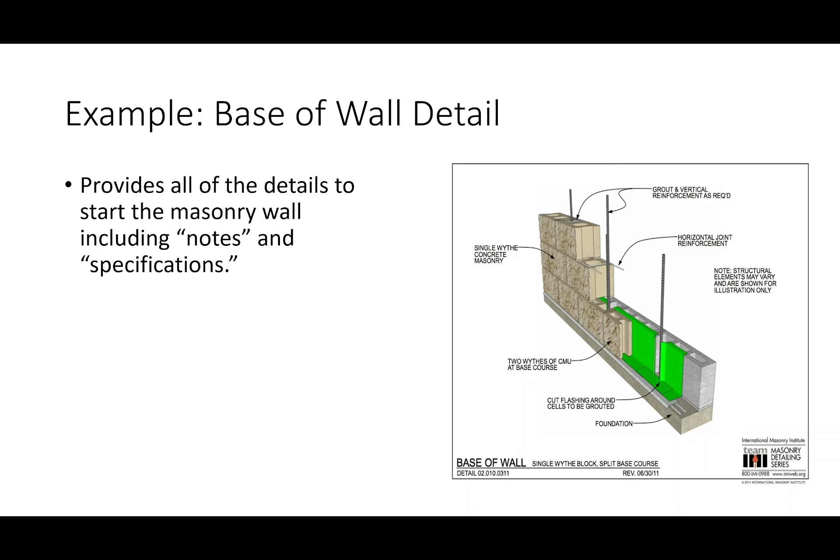This is something we'll discuss later, or have a homework assignment on, where I give you a 3-dimensional rendering and say, based on this 3D rendering, develop a front view, a top view, and a right view. I'll make you draw that out. It's not uncommon to see plan views, elevation views, and section views like that.

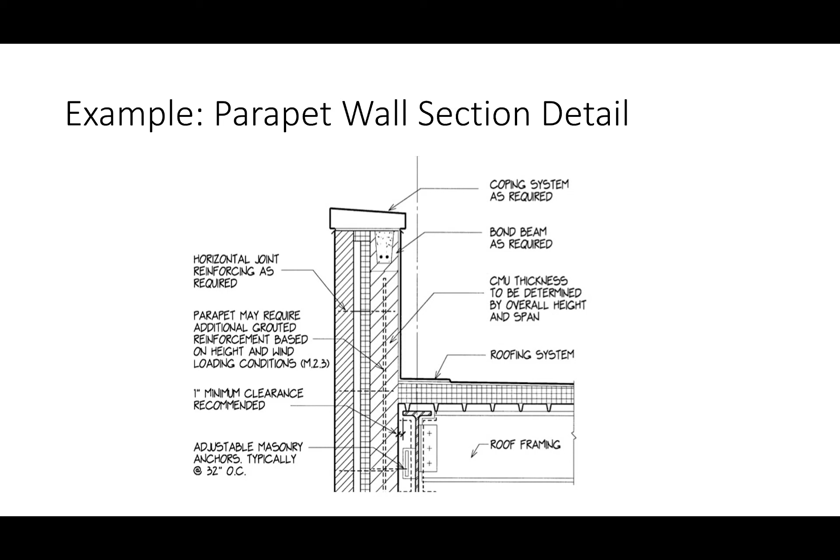Here's a view of the parapet wall, which is what you find on the roof. The only other thing worth mentioning is that the drawings will typically contain some sort of legend.

As an example, if you look at the electrical drawings, you'll see stuff like this: this is a switched duplex, this is a toggle switch, a 3-way switch, 4-way switch, and so on, and you'll see those throughout the wiring diagrams.

When you look at the wiring diagrams, I'm sorry, I'm just not that good. If there's anything that overwhelms me on plan sets, it's electrical drawings. I don't have the mind for it, I can't really see it, but that's why I went to civil.

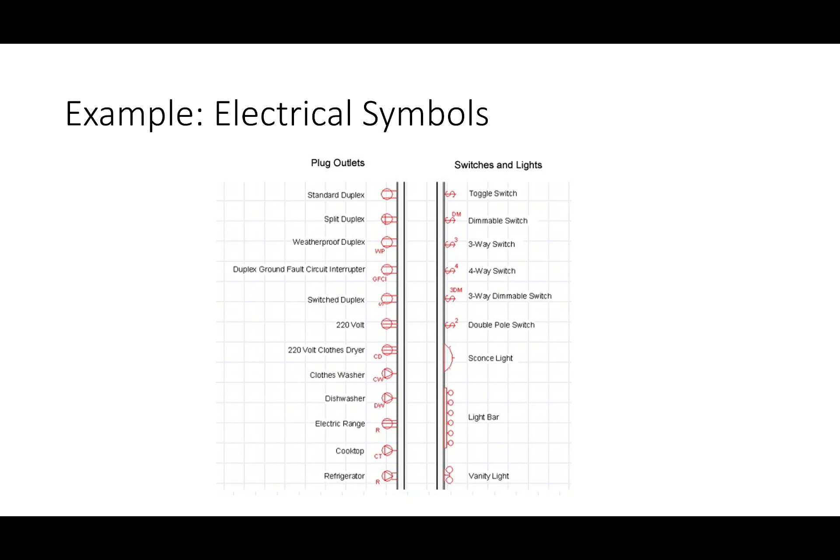You will typically see a legend set that defines what the symbols are. You see that in architecture drawings as well. For example, the architecture drawings have a series of hatches, and what do those hatches represent? Is this earth? Is this concrete? Is this wall section? Is this steel? So on and so forth.

You will also see general structural notes, and notes and specifications throughout the entirety of the plan set, indicating what specifications you're going to follow and some general guidance on construction.

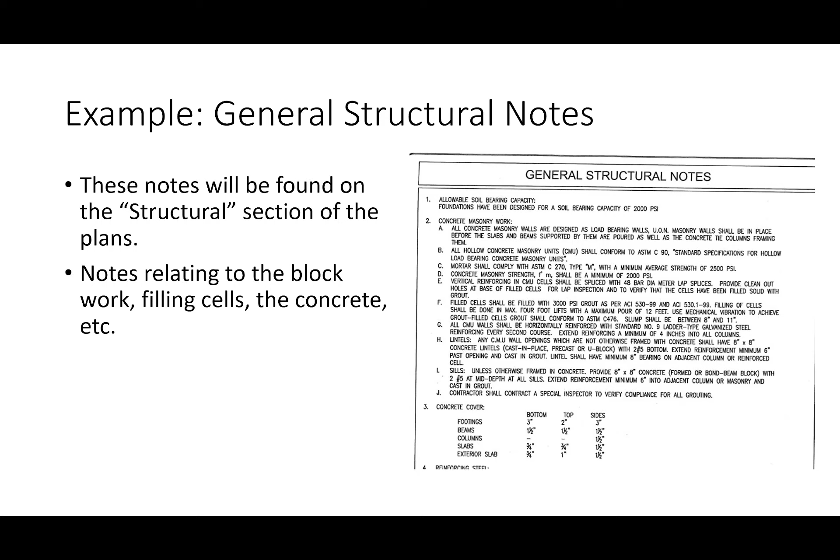A good example of that would be concrete cover. Cover is the distance between the rebar and the face of the concrete, and that can affect rust and corrosion of the rebar. If you have rebar exposed to the elements, it might have higher cover requirements than stuff inside the building. So you'll find general guidance on what the cover needs to be for elements that are outside, and so on and so forth.

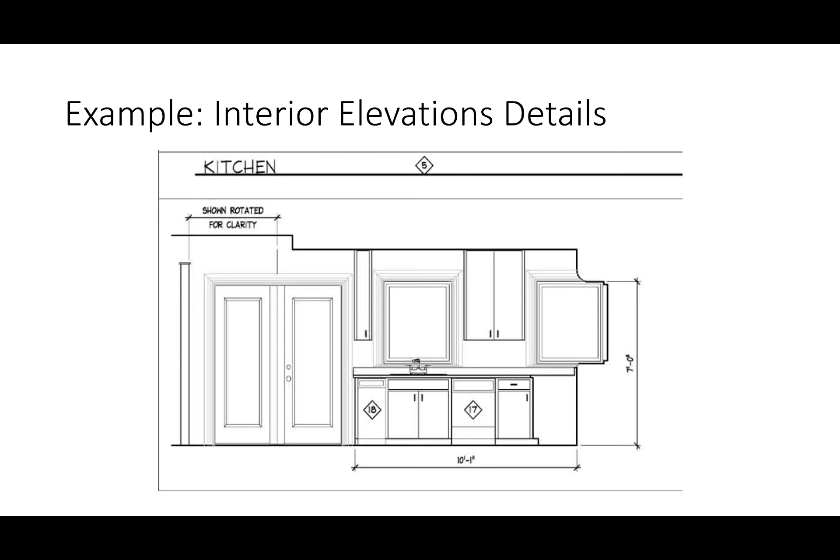Here's some more general renderings. This is probably more what you'd see on residential, like if you're drawing up plans for a house. This is maybe what a kitchen would look like.

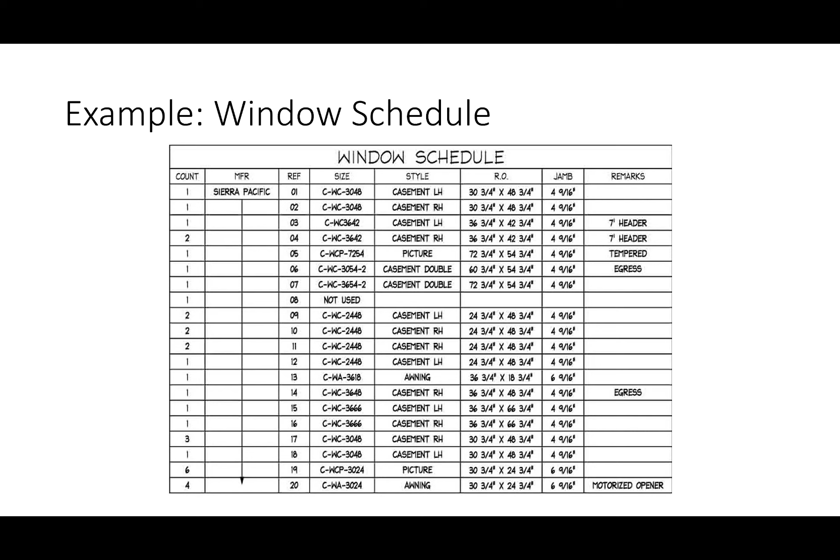One other thing you'll see in the plan sets, which I'll have you look through, are door schedules and window schedules. Instead of drawing all this stuff out, you'll just see tabular data: here's the size of the door in 1203, here's the size of the window in this room. After a while they're all the same, and really what you need is a list of stuff to order.